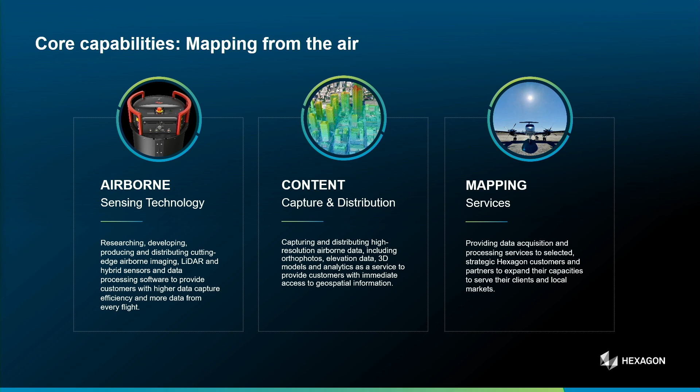So if you look into all this aerial mapping, there are a lot of changes going on. There are a lot of trends, faster refresh cycles. You all see it if you want to map a city. These days, the cities want to have a new updated model or data set every year, some cities even twice a year. The cost pressure is quite high. We want to have higher resolution and the areas get larger and larger. So this is what we see in the market, and this drives our development into efficient capturing, efficient processing, and accessibility to the data and to the results for everyone, if possible.

So our mission inside Hexagon is to have airborne data for smart cities, for digital twins. Here, an example from Manhattan. It's a point cloud from a LiDAR scanner in this case. Digital twin, why do we do it? And we heard this often today, you can only manage what you know. I think this is really important. If you don't know what you have, you are not able to manage it.

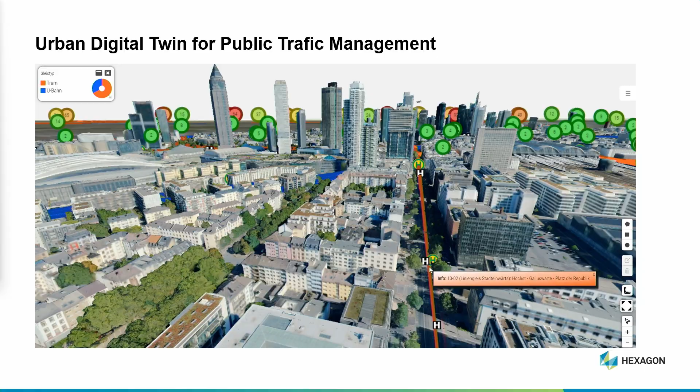So at Hexagon, we have a lot of technology available, and we want to provide the right sensor to get the base data for your digital twin. That means a digital twin lives in some kind of environment, and we see, for example, the aerial mapping data as a kind of framework for your digital twin.

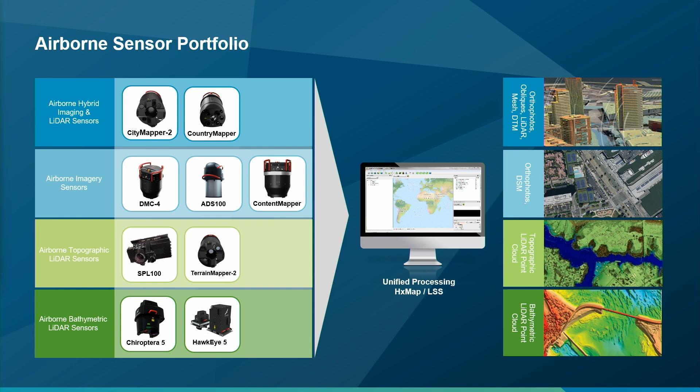So we have quite a portfolio of sensors that we can use. It starts from hybrid sensors, aerial imaging sensors, LiDAR sensors, but also bathymetric sensors. That's all for aircraft-carried sensors, so they are quite heavy. It's about 50 to 80 kilograms, so nothing for drones. That's for the real aircraft.

And this brings me more to the project for modeling a city. If you just look from the air, you have a certain perspective. The air is best to give you the roofs, a bit of the facades, but you don't see everything. You always have some occlusions. So in the end, if you combine different data sets or different source data, you get really the best models. What we do, we combine, for example, LiDAR, oblique imagery, and nadir imagery, but I will show it a bit later as well.

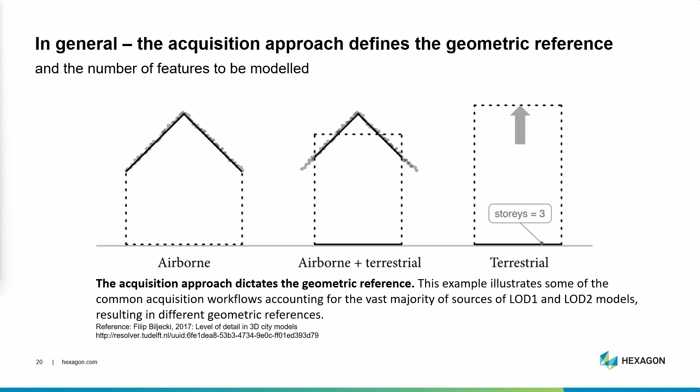And that brings me to one sensor, and I will describe the hybrid initiative, as we call it. It's the evolution of sensors. And I do this because that was the sensor that was used for this project. And if you look a bit back in history, how aerial mapping, how aerial photogrammetry evolved over now more than 100 years.

It started with handheld cameras, analog cameras. It went into somehow standardized aerial cameras. The first digital scanners came up in the 2000s, and now they are really operational. So the transition from an analog camera into the digital world was pretty fast within the last 25 years. On the other side, we have LiDAR scanners that are a bit younger from a history point of view. It's now about 30 years that they are in the market.

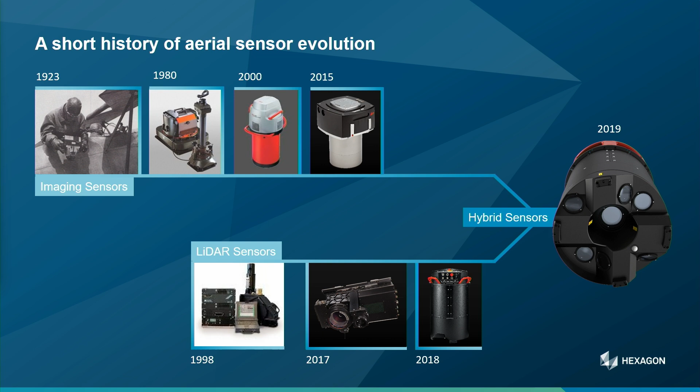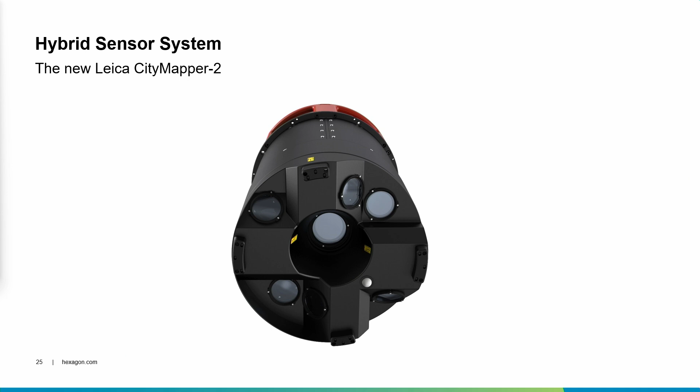And as everything gets smaller and technology became more powerful, it was a logical step to combine all these sensors into one pot and to design a hybrid sensor that consists of cameras and LiDAR systems. And we define something like this as non-compromise, always taking the best from the class, best cameras, the best LiDAR sensors, to build a so-called hybrid sensor, in this case a CityMapper, as I said, that was used here.

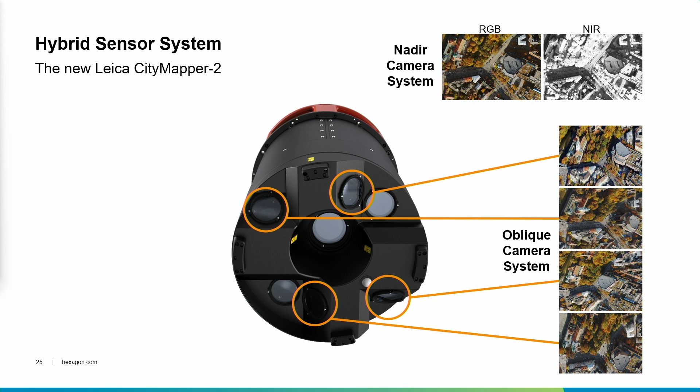We have nadir cameras that look straight down. We have oblique cameras that have a 45 degree oblique angle to see pretty well the facades. We have 4 of them, so one looks forward, one backward, one to the left, and one to the right side. And in addition to this, we have a LiDAR scanner that is an active system that gives you directly a 3D point cloud. And all this is combined into a very clever system where the components are well adjusted so that the point density of the LiDAR fits very well with the GSDs, or the resolution of the image data.

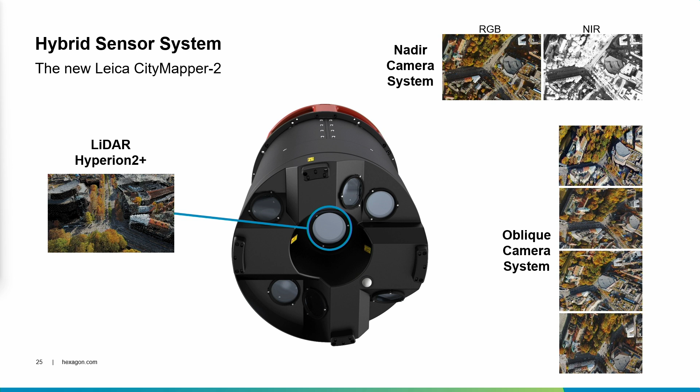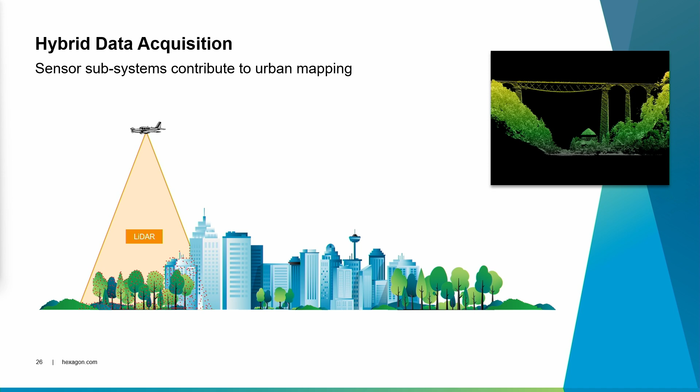If you look into the acquisition of such data in a city mapping project, we use our LiDAR to get the 3D data. We can look underneath vegetation, so we get ground, we get vegetation surface data, we get quite well also vertical structures, because we use a kind of circular scan pattern that looks also a bit oblique. That's the LiDAR. We have the nadir data that has the classical photogrammetric view from top that gives you all the details from the rooftops. So it's perfect for modeling in detail the roofs, but also giving us a texture for the roofs and for the plane.

And we have the oblique cameras that look with 45 degrees into the scene, and that gives you a lot of information of the facades. We can use it for detailed modeling of the facades, and that's important for the project here, to texturize our 3D models with a real texture to see how they really look. We don't want to have, at least not for the LOD2 models, artificial texture, but we want to have the real texture from the imagery.

So if we put the two kinds of sensors together, image data and LiDAR data, they are very complementary. Usually image data has a lot of details. It's very fine, granular in the XY plane, so in the horizontal plane. It has also a very high accuracy in the horizontal plane.

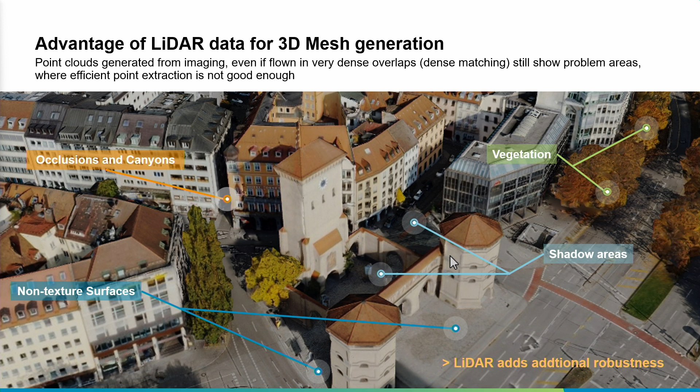And that means not just, let's say, I have a million square meters of vegetation, but I have every single tree. I know where it stands. I know what height it has. I know what diameter the tree has. And that can be modeled pretty well from these data sets. Also, low texture areas can be modeled pretty well because we have the LiDAR. The LiDAR supports the acquisition.

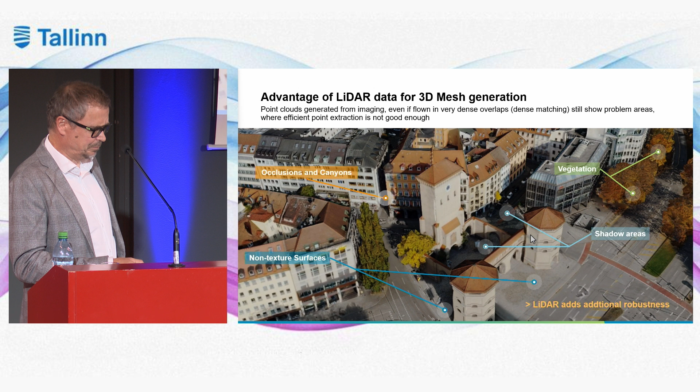Moving to Tallinn, that was a bit the starting point. On the sensor side, the Tallinn project started at the beginning of this year. The tender was design of workflow and data flow for 3D digitization of Tallinn city buildings, and creation of a detailed 3D model. So that's quite a long title, a long offer. And if you look into the project, it's subdivided in two parts.

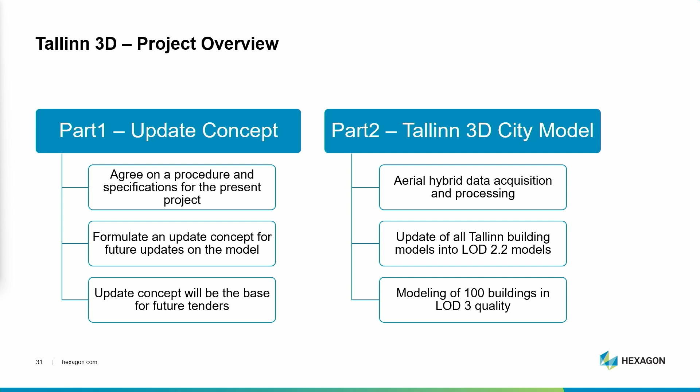Part one is an update concept, but I will better start with part two, that's the 3D city model. So the goal is to model the whole city of Tallinn with LOD 2.2, I'll show you a bit of a definition on this, and having all these models texturized. In addition to this, modeling about 100 important buildings in LOD3 quality comes on top. And what we added to the project, it was not in the tender, but we need some data to do all this work: we do aerial hybrid data acquisition and all the processing to get the data to be able to model all the other things.

Then, after modeling, the world is going on, so there will be an update necessary for the city, and we develop, that's an ongoing thing, a whole concept on what needs to be tendered out, what needs to be written for somebody who needs to update the 3D model. And therefore, it's very helpful because we take our definitions that we have in our production workflow and put them into a general document and say, okay, those are the parameters of how we did it, and we adjusted them with the city of Tallinn.

And we built a concept that the next one then really can follow and really knows within a tender process, within an offer, okay, this is needed, and we have all the details how to move on, how to offer an updated city model, maybe a whole one for the whole city or just for parts. There are different options available.

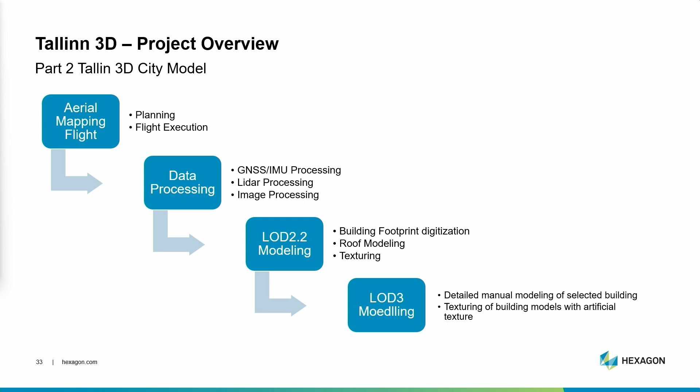A bit of flight planning, what have we done? We use the CityMapper, that's the sensor I showed to you. We have a really high GSD. GSD means the ground sample distance. That's the smallest details that are in your imagery, and that is below 4 centimeters. And that's really detailed. I will show you some examples as well.

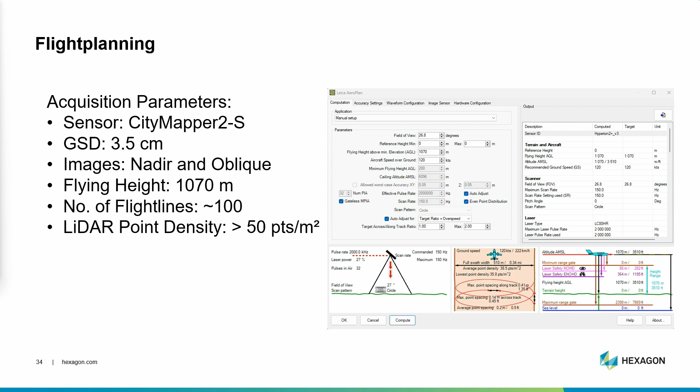Getting this, you need to fly about 1,000 meters above ground. And that also gives you a lot of LiDAR points. If you have a powerful LiDAR, we have about 50 points per square meter. That means about every 14 centimeters you have a point on ground. That's really a lot of points.

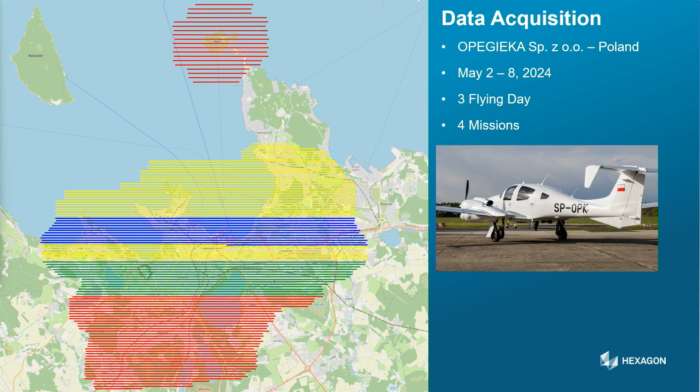If you look into the data acquisition, here you see the aircraft that was used. It's a Diamond aircraft. We had a cooperation with a partner flying company from Poland. It's called OPEGIEKA. They used their CityMapper to do the flying here. The data acquisition was between May 2 and May 8 this year. It was still leaf-off, so it was right in the beginning of the vegetation period.

We were really lucky that we had good weather, clear sky. Everything could be done within 3 flying days, 4 missions. And you see the area here and all the flight lines that have been used. And now it becomes a bit denser because I put every single exposure point onto the map. And you can read it here.

It's about 100,000 images. Every exposure produces 5 images, so it's about 20,000 points where we took the nadir image and the 4 oblique images, GSD 4 centimeters, LiDAR points about 50 points per square meter, very often more. That depends a bit on the overlap of the flight.

If you look into the general workflow, it goes into the processing. We do LiDAR and image processing, the trajectory processing. We do QC for every step, so we check the data. We have a so-called ingest, where we take the raw data from the camera, from the sensor, and transfer it into real imagery, real point clouds. We do, again, a review of the data at the highest quality level.

We do aerial triangulation. That means we need to really adjust the geometry of the data for the images, but also for the LiDAR, to make it simultaneous, synchronized. We really put it together, LiDAR and image data. And from this, you could do the product generation. We haven't done it so far, but I will show you a bit more about products that can be derived. We use this aerial imagery and the LiDAR data for our production, and also provided it to the Estonian Land Board for further processing.

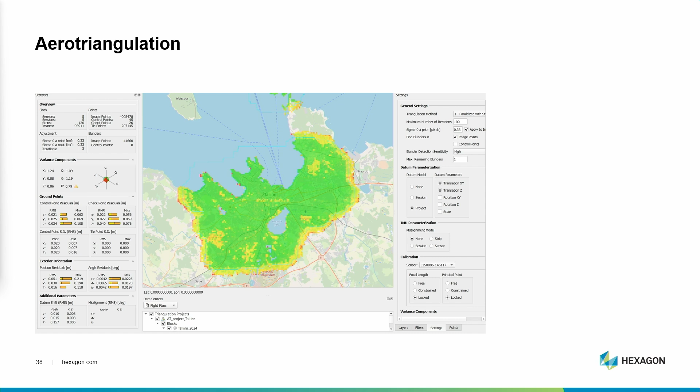And you see towards the edges, it gets a bit red. That's not critical, but usually at the edge you have less overlap and fewer images. So that means it's not perfect there, but you extend your flight lines over the project area. So that's not a problem at all.

If we look into some of the statistics for the nerds between us, if we look onto the accuracies, I said it was a flight with about 4 centimeters, and we have an accuracy on the control points, but also on the checkpoints, that is about half a pixel, so really high accuracy in the whole block. We got a lot of ground control from Land Board, so that was the deal.

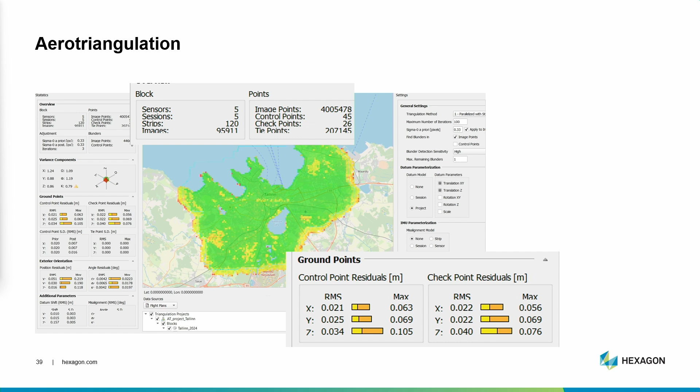We got the points, they got the data. I think a fair deal. It saved us from going into the city and measuring ground control points. So really good results, accuracies. Yeah, I think that's something a surveyor really loves to see, half a pixel of accuracy.

Looking into some samples of the imagery, I hope you can see the quality. I selected one image from the zoo here. The building we are in is not in the image. I was not sure which building it is, so I just selected one. And on the right side, you see a bit of the details. One of the images is 14,000 by 10,000 pixels, so it's quite a lot of details, and you see a lot of things there.

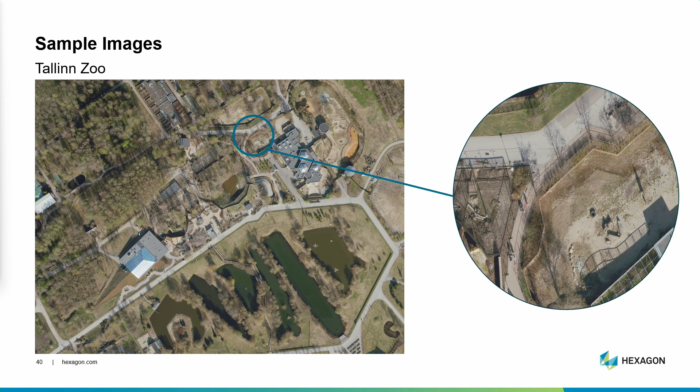You also see what it means to fly in a leaf-off period. Everything does not look that nice because we don't have this pleasant green color that you usually have in a summer flight when all the trees have the leaves on. But for our purposes, it was important to fly without the leaves, because if you have the trees fully covered in front of a building and you need this as a texture, you have a lot of occlusions and don't have a good texturing for the buildings afterwards. So from this point of view, this a bit more depressive kind of image is best.

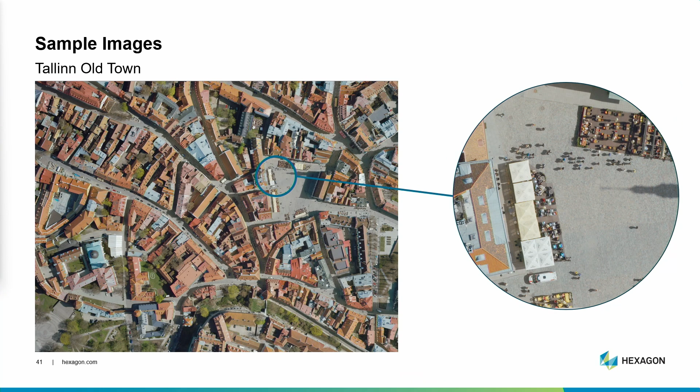Then, as I said, we also had LiDAR data. That's one example of the LiDAR data, just colorized with the height. An important feature to notice is that you have not only the ground, but you also see a lot of LiDAR points in the facades, and that comes from the technology that we are using. Our LiDAR is a circular scanner. That means it looks 20 degrees from nadir and circles, so it always looks into the vertical objects as well. And it can penetrate through vegetation.

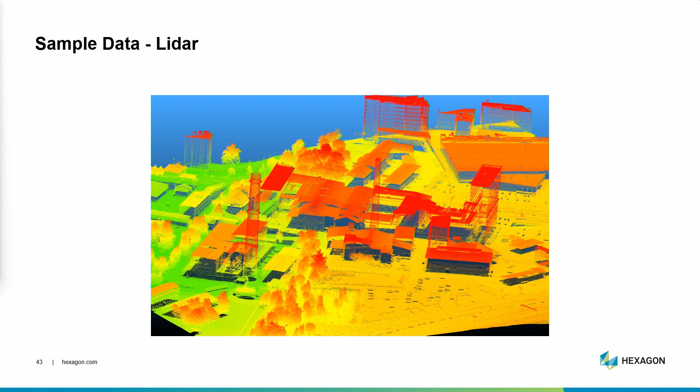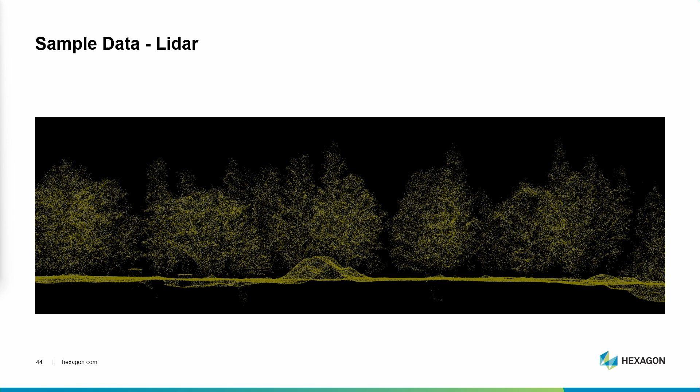What you can easily see here is a profile through a bit of vegetation where you see all the ground points, but you also see all the structure in the vegetation, a lot of details, and I think it's a great example where you really can use LiDAR data for detailed modeling of, for example, vegetation parameters.

Most important for me is the LOD2, where we have these structures on the roofs from a certain size to be modeled. Also, if there are extensions on the buildings, they are also modeled. If we have substructures of buildings, they are modeled, and we have detailed modeling of roof types. I will show it later.

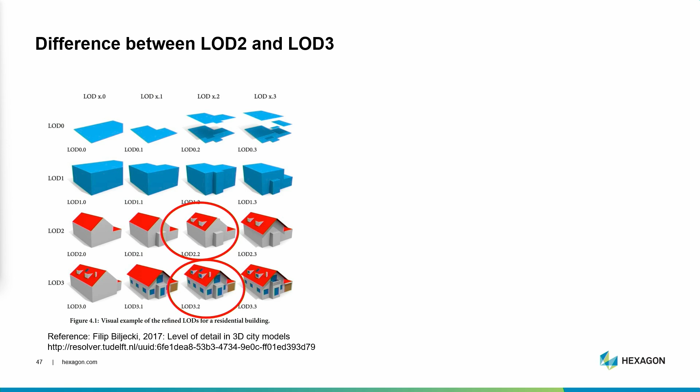If you look a bit above, the LOD1 is the current state of the Tallinn city model. Not in the old town, there we already have the LOD3 modeled in detail, but for the whole city we just have these block models, and we want to replace them with these detailed models. Here you see a bit more in detail what it means.

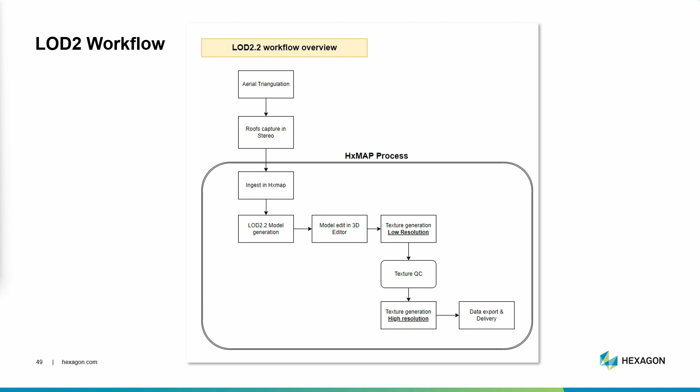The whole process, I don't want to bother you with all the details. I go just through the process that we use. I do it fast because it's a bit technical, but I want to show what it means to model a whole city in a certain kind of detail. We speak about, I think, about 100,000 or even more buildings, so it's quite a lot that we need to do. It's quite some manual work.

We do it with our colleagues in India. That also meant that we need to cut out all the sensitive areas. So that is also done. I haven't mentioned it, but that is an important part of the whole workflow, really to give our colleagues in the production only what they are allowed to see, and that means everything that is not classified. Everything that is classified is not needed to be modeled, so from this point of view it's quite okay, quite easy to do.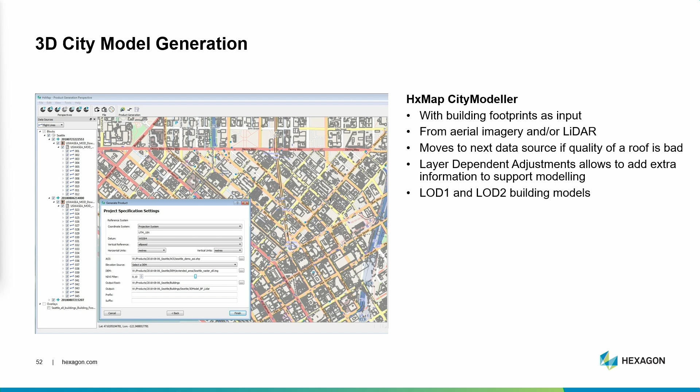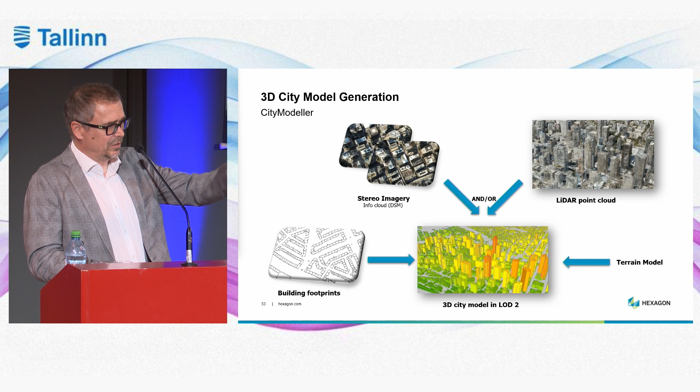As a software tool, we use our internal tool that comes with the sensor. It's HxMap CityModeller. For the city modeler, you use building footprints, you use stereo imagery, and you use 3D data to model your buildings. All starts with a building footprint.

In our case, we decided not to use the wall footprint, but to use the roof outline as a building footprint. That can be defined, and as we work with aerial data, usually the roof outline is easier to model. It stretches, it makes buildings sometimes a bit larger if there is a roof overhang, but from a practical point, it's the best solution to do it for a whole city.

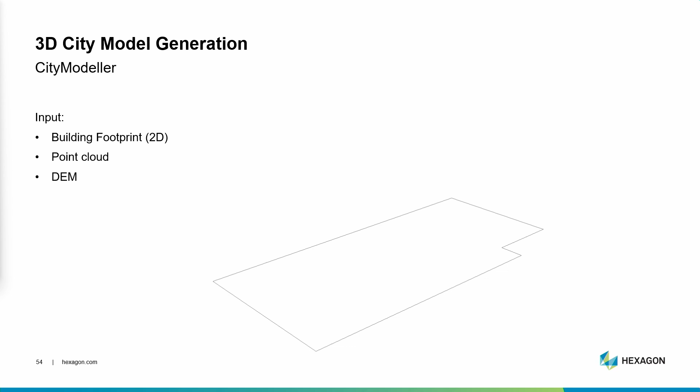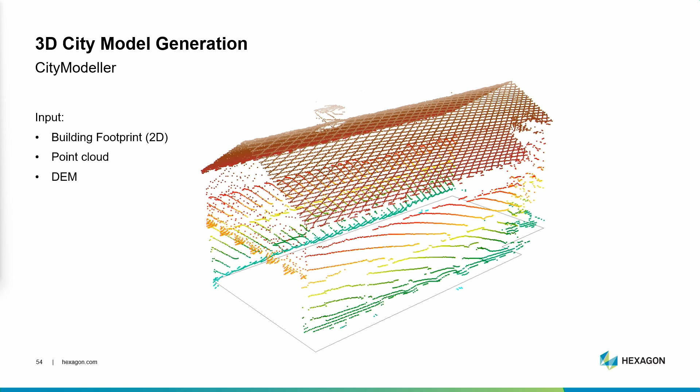Then we have our LiDAR data, and we also could use 3D data from semi-global matching, but as the LiDAR point cloud is dense enough, we used the LiDAR data to model the building, to model the walls, and to select the most suitable roof primitive that could be used for a building, and that will be taken.

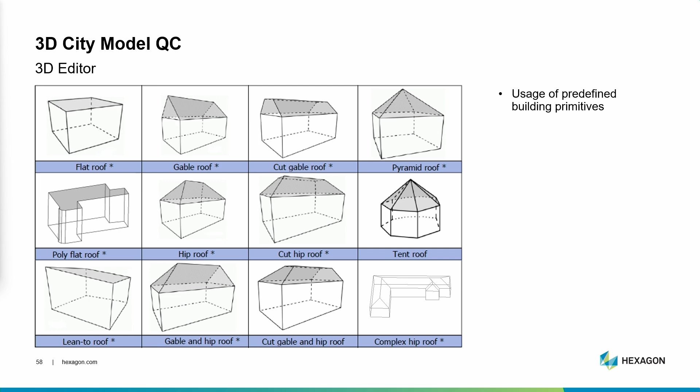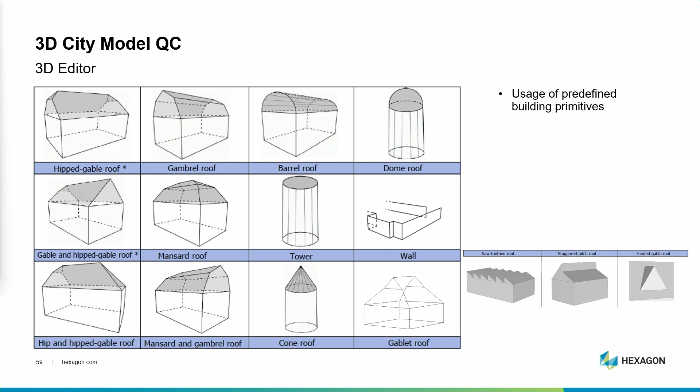Usually one building primitive for a more complex building is not enough, so we need to subdivide our buildings into smaller parts and then use different primitives for the whole building. I'll show you more examples on this. There are other roof primitives available in our process, and if you look around a city, you really need a lot of different primitives because buildings are quite different.

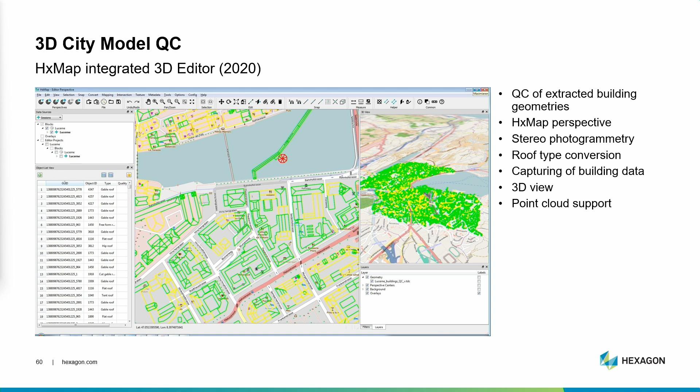We do a QC, we have a 3D editor where we really check what is going on, is everything good enough? Then we do the texturing, we use the oblique imagery to texture our buildings, and you will be impressed by the quality, how buildings look with this texture on it. For the texture, we really make sure that we take the best oblique imagery with the least occlusion.

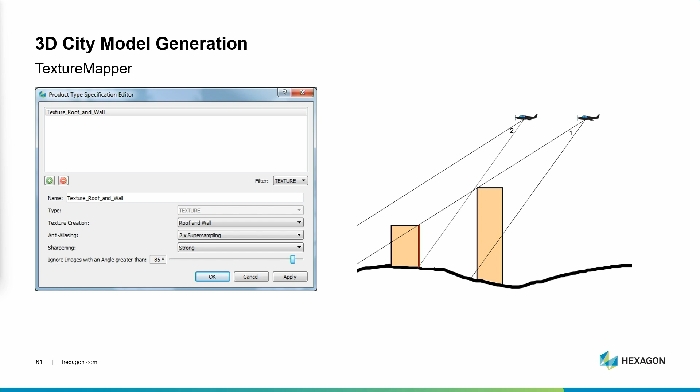So in this case, if we want to model the little building, the texture from image 1 is not suitable because all the information for the little building is occluded by the big building. So we need to use the image from the second exposure, and all these things are calculated to get the best texture for our building in the end. Some parameters need to be set.

Let's go to Tallinn itself. Now we see imagery and screen dumps from the project, from the production. So it starts with the modeling of the footprints, as you see here, the green and the blue ones. The red crosses are for objects that do not fit a certain size. So there is a minimum building size that we model. Everything that is smaller will not be modeled.

We also use existing buildings to get the building number. It's a so-called EHR ID that every building in Estonia has, and we intersect it with this.

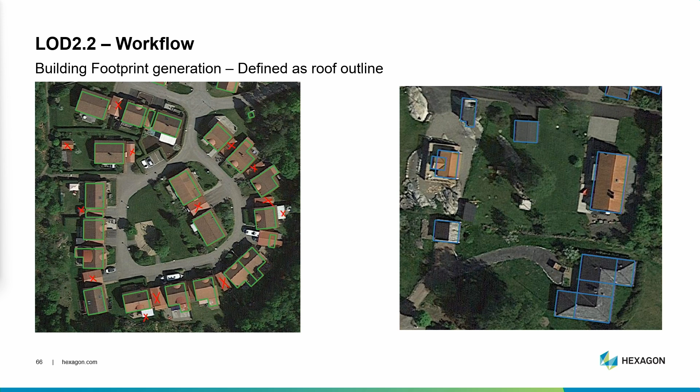We use these building footprints as an initial footprint and then extend it, and that is what you see on the right side. There are some buildings that have a mix of different rectangles, and that means if we have more complex buildings, we need to subdivide our roof into different parts to be able to use the right building primitives. So again, some examples where we modeled different parts of the building for the later roof primitive matching.

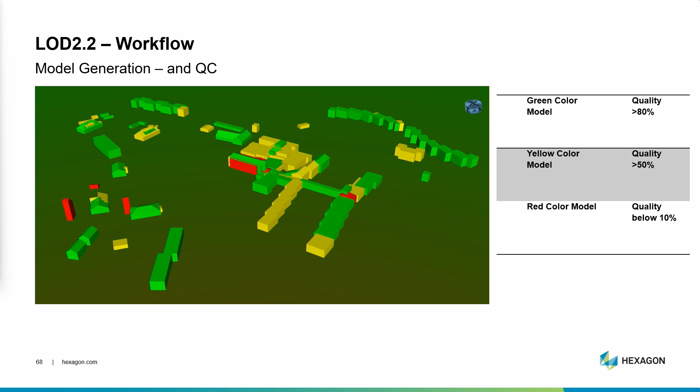And what we do then, we check for QC. That means if we have the building footprints, then we use the 3D data to check what is possible, and then there's an automatic process checking the quality of every single model. And here you see the colorization. The green gives us a calculated quality of above 80, the yellow one above 50, and the reds are quite low quality with 10. And that gives some indication where we need to focus our manual rework that usually is necessary. A bit of a table to control everything.

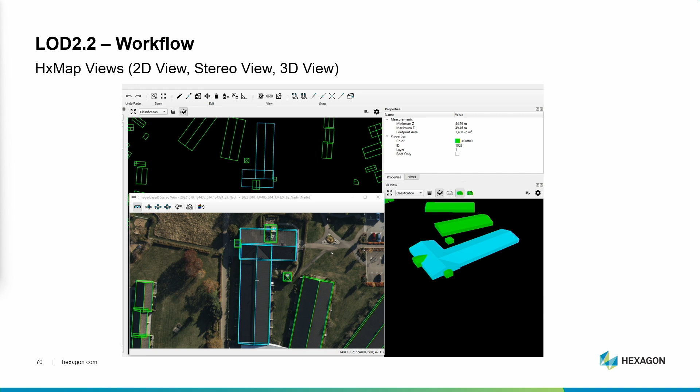And after having this automatic analysis, it goes into the manual 3D editing work. That means we really look into our imagery together with the roof model and check in 3D with the stereo model if the roof type really fits the reality, and do some adjustments here as well. We need the stereo at that point, otherwise we will have the tilting of the buildings from the central perspective in the imagery. So that is what is done in the QC.

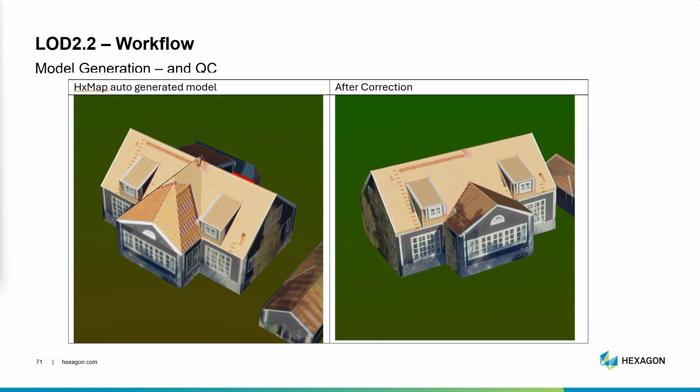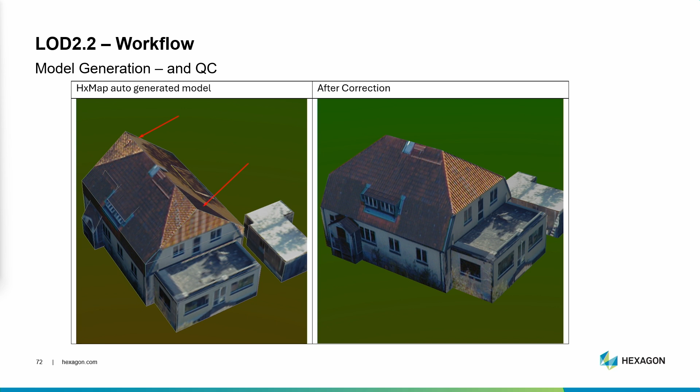On the left side, you see the automatically derived 3D model, and on the right side, you see the corrected one where the roof parts really fit together, the dormers are correctly modeled, the texture fits the roof. That's really a Tallinn building here that was corrected within our QC work. Again here, the automatic model generation failed a bit. The QC discovered the wrong roof type and corrected it manually so that you have a really good 3D model of this smaller building.

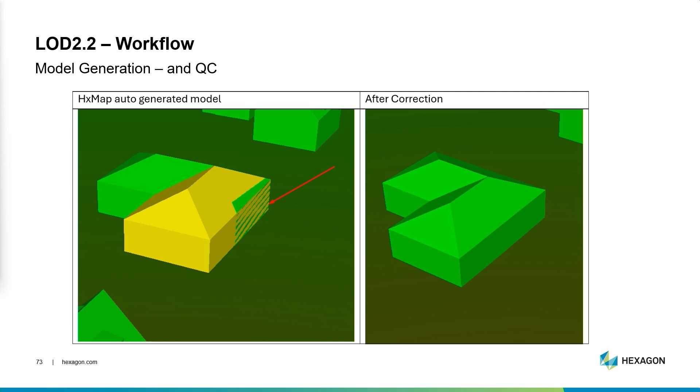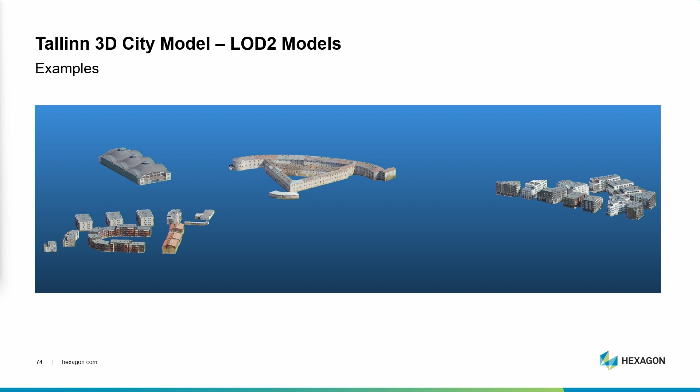Looking into examples, that's a first test area that we did. It's the harbor area along the coastline. It's the old prison and the museum where a submarine is located, and a really new built-up modern part of the new city here. Let me show you some more details so that you get the idea of the quality of the 3D models.

You see, even with these flat roofs, it's not just a flat roof that is modeled, but if you have these larger balconies or terraces or whatever, these details are modeled and textured in the right way. And this is the big advantage of having real texture. It looks like it has so many details. In the end, it's just a plain facade, but with this good texture, it gives you all this information, and your brain interpolates the additional information, and you get a really good feeling of how these buildings look

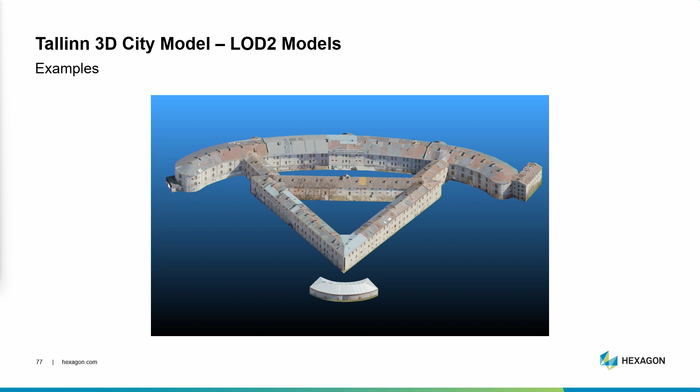like in reality. Another example, more details here, the whole prison modeled. So you see, this is one model here because it has one ID, and we need to put it together into one model, and that makes it really complex, and you cannot do it in a fully automatic way. So there is always manual work needed for these things. See the details again here, and all this great texture that is put on the facades.

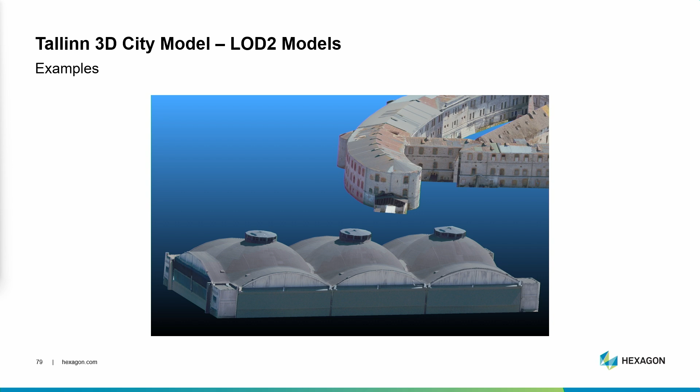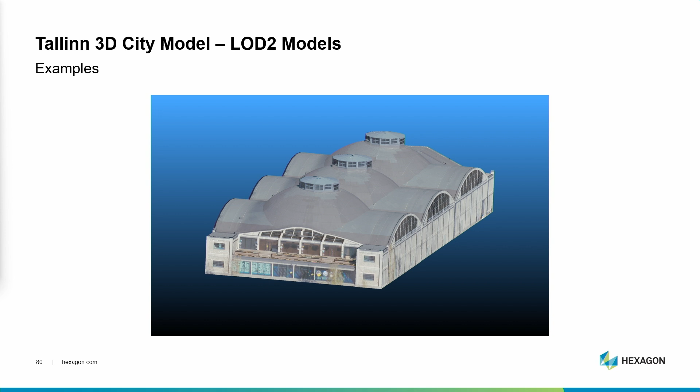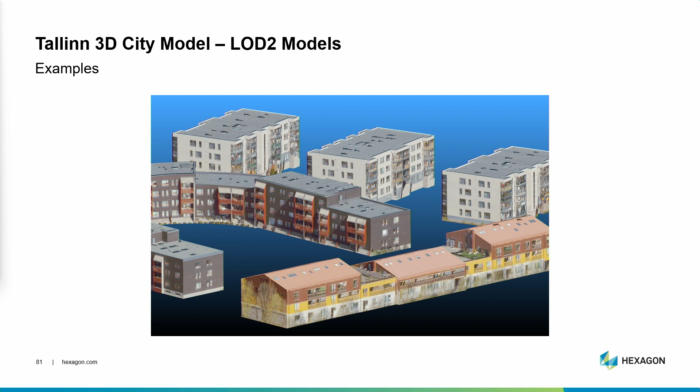Also with this quite complex, really strange roof shape that you have on this former bunker, I think, or hall. And if you look into the details, it's really amazing what you can do in this workflow and how much detail you get. One would think it almost looks like the LOD3 models. That was my first impression as I saw these examples. Looking a bit at the other side, also all the details. You have these non-flat roofs on the other side, and more details here.

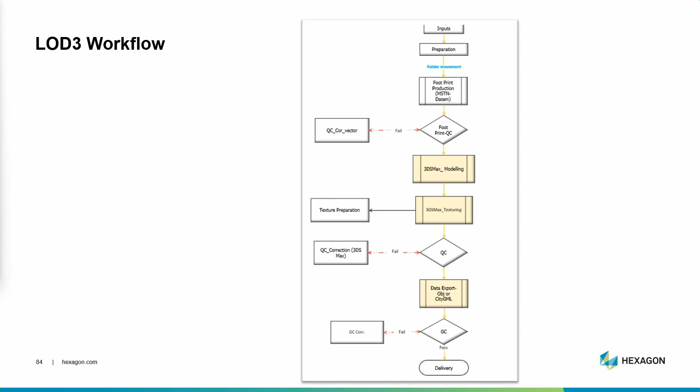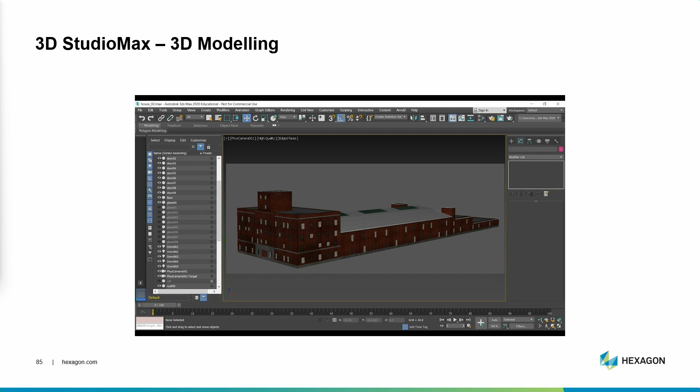So that was the modeling. I think the results are really promising, what we get out of this data set. One little example from LOD3 modeling, how we do it. Again, in the workflow, most things are done in a manual way, so we model the whole structure, the whole building in 3D Studio Max, and in this situation for the LOD3, we add artificial texture, because that keeps us consistent with the existing LOD3 models that already exist from the Old Town.

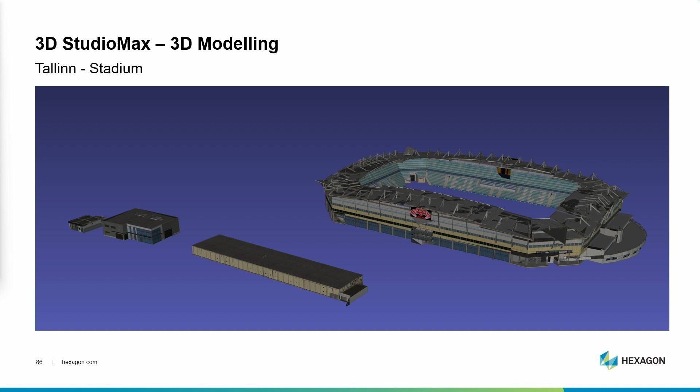And we modeled the stadium. That was one of the first we did for Tallinn. A really complex one. It's a lot of work to do, and it has a lot of texture files in it. And if you look into these details, I just looked into the internet and took the real image of it. And I think, except the yellow is not the perfect color, it's really in a level of detail that's amazing for a 3D model.

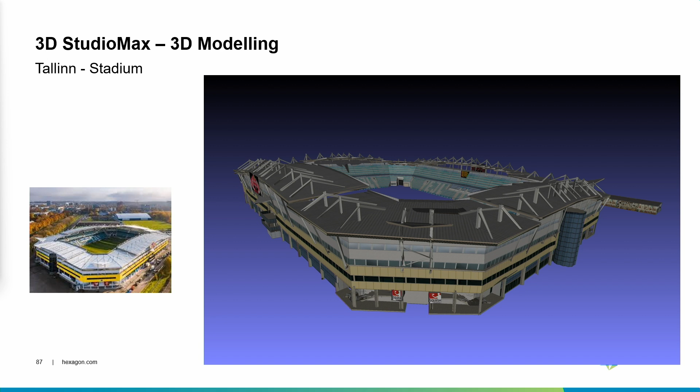I have 2.5 minutes left. I want to show a few things, a few possible applications, and I also want to start some discussion. One is real texture versus artificial texture. So if you build a 3D model of your city for your digital twin, think about what you want to use. Artificial texture is more generalized, but it has no trees in front of it. So you don't put vegetation onto your facades, and you have no occlusions and so on. So there might be a pro and con for the one or the other.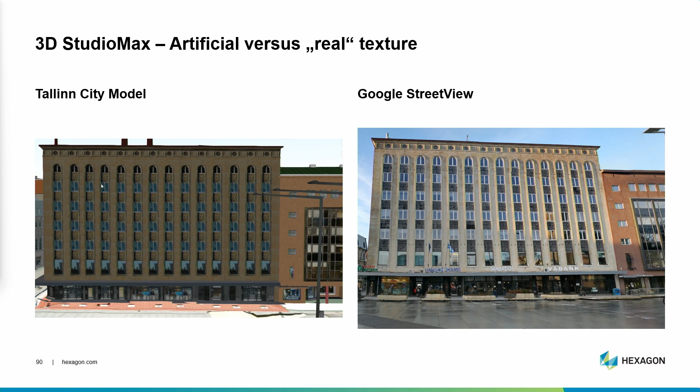Also, if we look into the artificial texture, and I took the street view imagery, that's from the existing Tallinn City Model. It's not the perfect texture, but you can get something that is very close to reality. And I think if you really want to have something without any errors in the texture, you need to use artificial texture. Again, more details here, but everybody needs to decide by himself what is the right way.

Usually the LOD models are isolated, so you need imagery where you can put them on. You need to model all the other infrastructure like trees, like street furniture and so on. If you don't do it, the buildings will look a bit isolated, like in the example I showed from Tallinn. If you have the 3D mesh, everything is in it. But it has differences. It's difficult to carry information, to carry semantics in the 3D mesh model, which is easier in the LOD model.

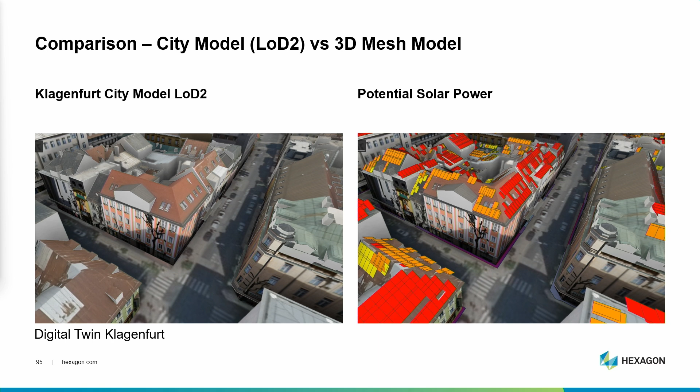Again, one example from Klagenfurt, that's in Austria. Here we put solar potential onto the LOD2 model, and we not just calculated the solar potential for a whole roof, but we checked how many standard panels we can place on a roof, taking into account the windows, the chimneys, the dormers, and whatever is there on the roof, and then also checking whether there is any occlusion, any shadowing over the day that comes onto the panels, and from this the potential energy that you can produce is calculated. So that's one application to think of.

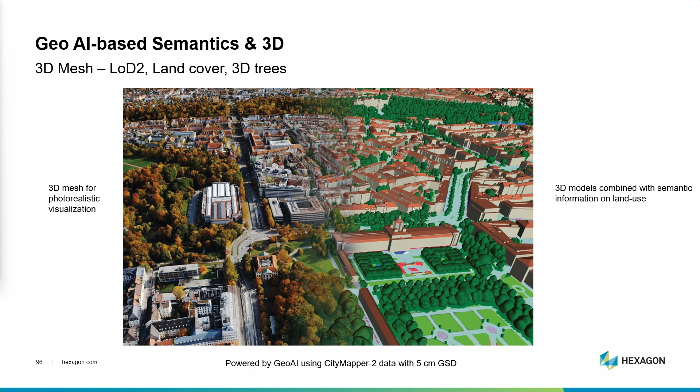Here I put together the LOD on the one side and the mesh model on the other side. From my point of view, they can live together. The one carries the semantics, the other is nice for viewing purposes, it gives you the nice view. But people need to decide. If you do it with a LOD model, you always need to take care of the underlying image information.

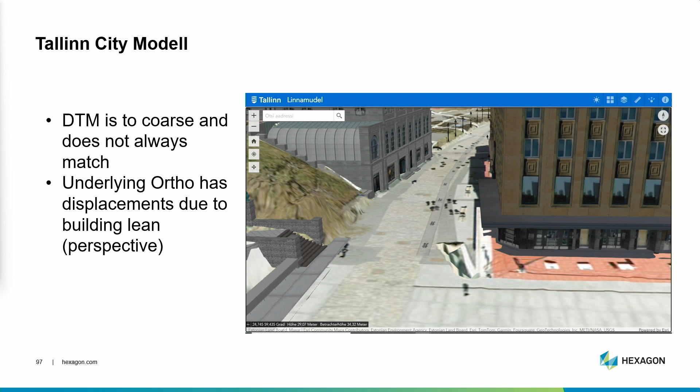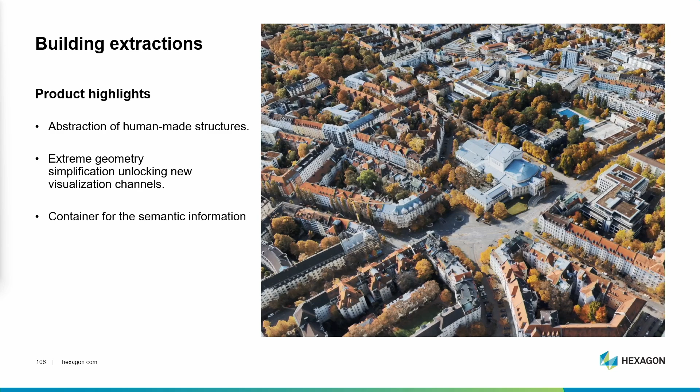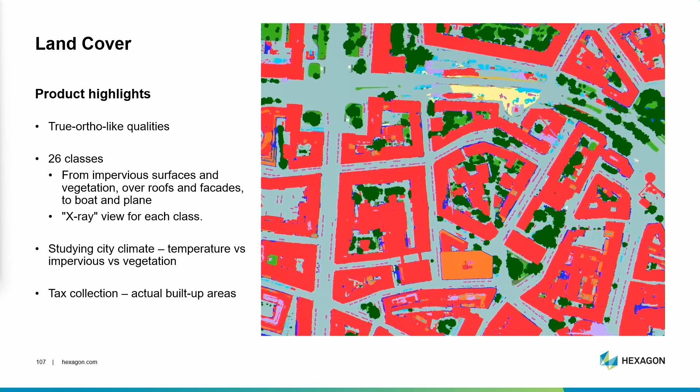As we do it from the original imagery, we can also look a bit from the side underneath the trees, and we get, for example, the impervious areas under the trees also classified, and we have a kind of 3D classification from imagery. We can do a tree extraction. So what we do in our automatic process is having modeled every tree with the height, with the position and the crown diameter, what is very helpful for a lot of applications.

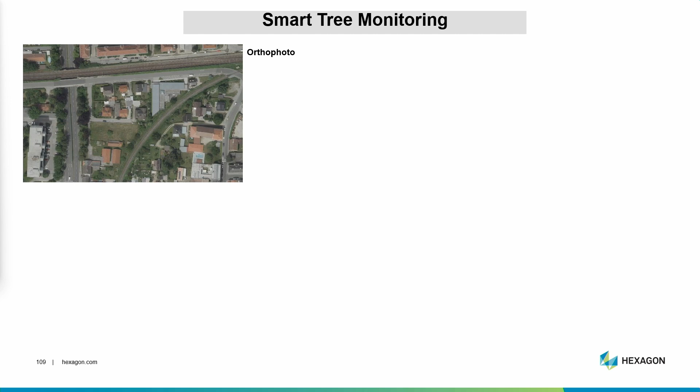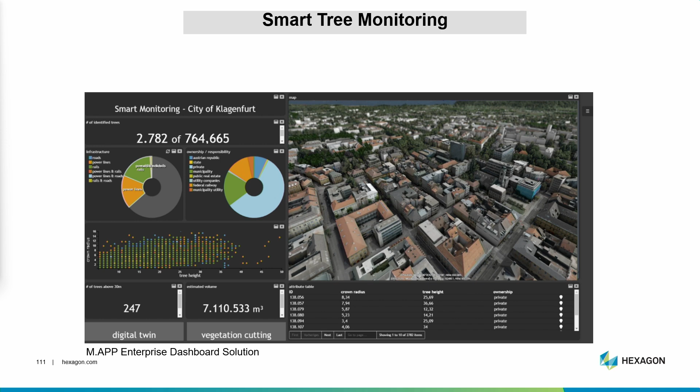It works really great on single trees, on alleys. It's not perfect if you have these dense forest-like groups of trees, then it's a bit more of an interpolation. You can do smart tree monitoring from this, getting every tree and building it into a dashboard, into real information, assessing the dangerousness of a tree. What if a storm knocks down a tree? What is the danger? Is there any infrastructure nearby? Who is responsible for the tree if you intersect it with cadastral information?

We can do planning. We have seen this quite a few times today. We can also use these things for wind circulation modeling. We have also seen it from Uwe in the presentation before. We can do similar things here. You can do this with a LOD, but also with a mesh model. And you can use it for 5G network planning. You can do, as I've already shown, solar potential. You can do viewshed analysis with the 3D data.

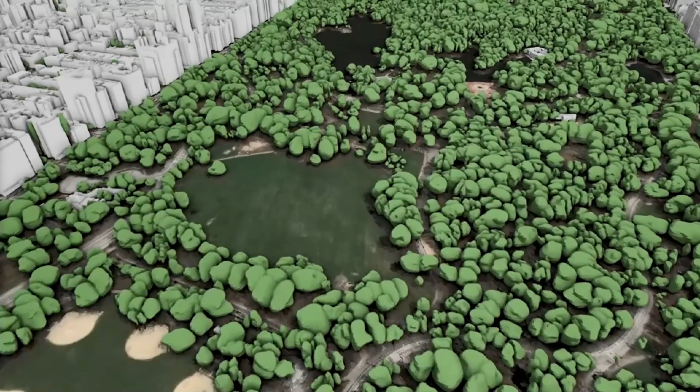And that's, I think, another example of wind circulation and tree modeling and everything done in a more or less automatic way in New York City, where you have all the trees in Central Park. You modeled all the single buildings. In this case, everything was modeled automatically. So it's not perfect, but it's a quick result for vector modeling.

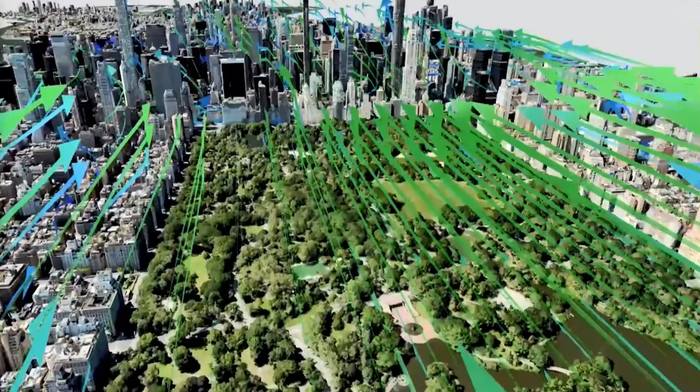You can use this also for getting kind of green mass indices for a certain area where you can calculate impervious surfaces versus green space. You can do again the wind circulation modeling. You can simulate what happens if you build a big building within this wind stream and so on. So really a lot of potential applications.

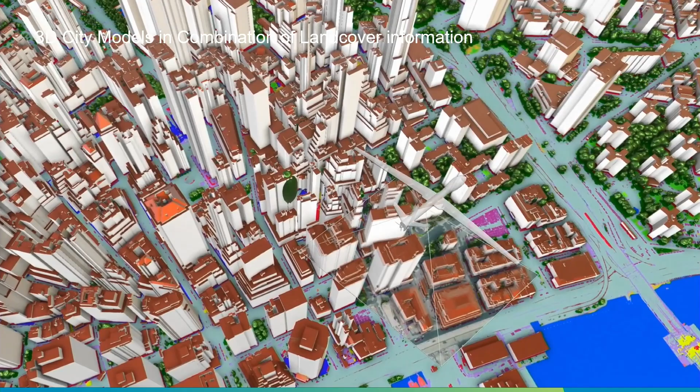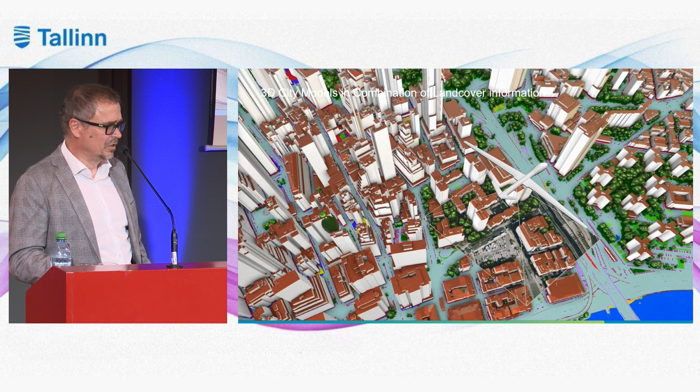And what I would always advocate for is you need this aerial image information to have the base, to have the framework for any other detailed information that you usually would need. You will need, for example, a street view campaign. You will need your sensor data. You will probably need some drone data to close gaps or to get more details for certain areas. And all these things will also make it into our concept that we write. If we just want to update a little space, probably a drone is the better way. If you want to update the whole city, then we go for an aerial flight or whatever is the best solution.

And that brings me to an end. Thank you for your attention. It's pretty late, and I'm happy that so many people stayed here. And I hope I could give you a bit of information on what it means to do such a big project. Thank you.